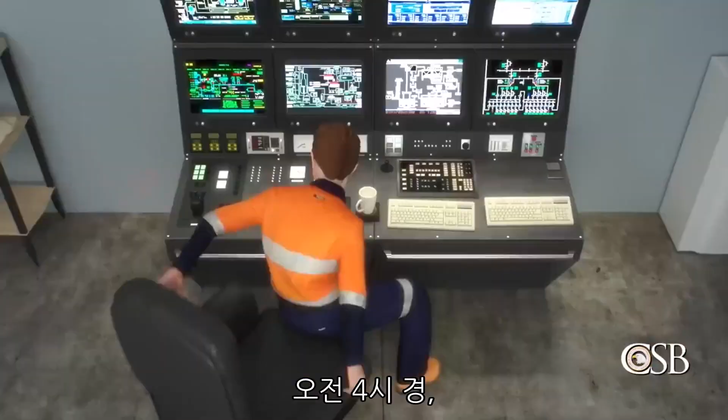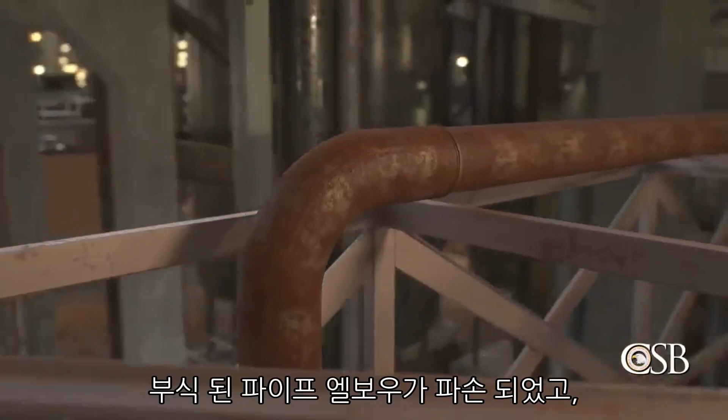On the day of the incident, the HF alkylation unit was operating normally. Shortly before 4 a.m., a board operator in the refinery's main control room performed a routine change in the configuration of the process within the unit. The operator increased the flow of process fluid in an area of the unit by a total of 7 barrels per hour. Stable operation continued, with no abnormal pressure or temperature changes in the unit as a result of these actions. But nevertheless, at 4 a.m., a severely corroded pipe elbow within the unit ruptured.

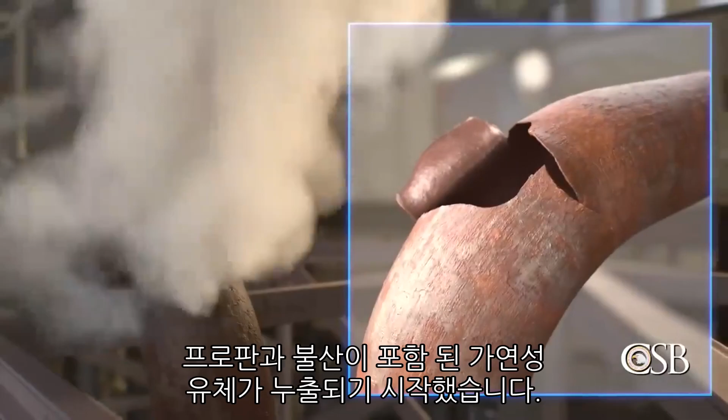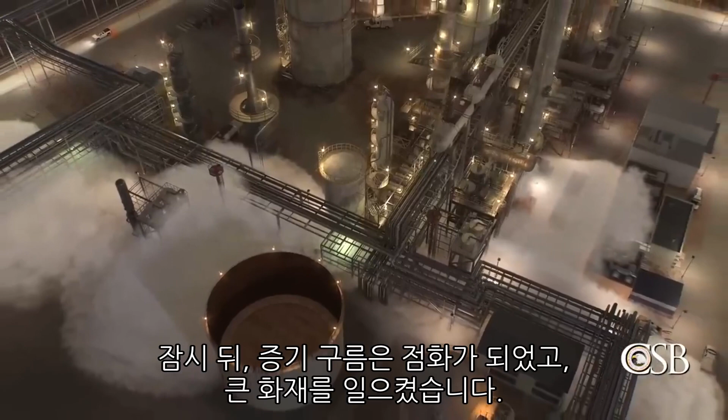Flammable process fluid containing mostly propane, along with a small concentration of HF, escaped through the failed pipe elbow. The leaking process fluid formed a large ground-hugging vapor cloud, about 10 feet high, that engulfed a portion of the unit. Moments later, the vapor cloud ignited, causing a massive fire.

Approximately 30 seconds later, the board operator took steps to prevent the release of additional HF. This was done by rapidly draining the unit's 339,000 pounds of hydrofluoric acid to a special vessel called the Rapid Acid De-Inventory, or RAD drum. The RAD drum was designed to safely hold HF in the event of an incident.

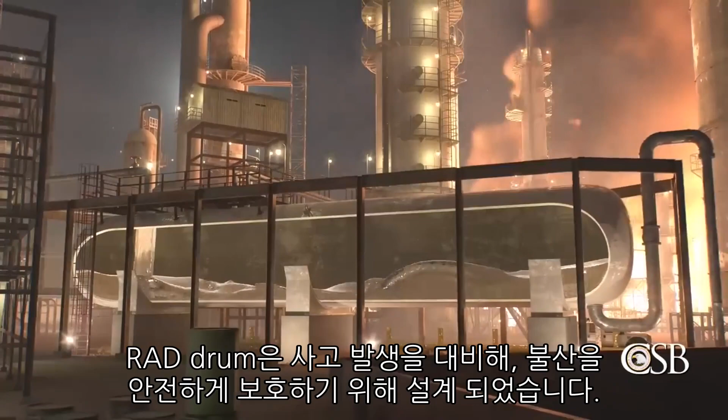At 4:15, due to the ongoing fire, an explosion erupted in the alkylation unit. 4 minutes later, a second explosion occurred. At 4:22, a process vessel in the unit containing flammable hydrocarbons violently ruptured, causing the third and largest explosion. A giant 38,000-pound fragment of the vessel flew across the Schuylkill River and landed on the river's opposite bank. 2 other fragments, one weighing about 23,000 pounds and the other about 15,500 pounds, landed inside the refinery.

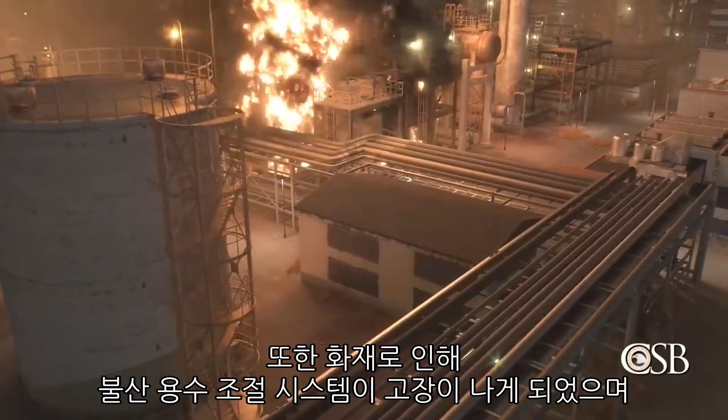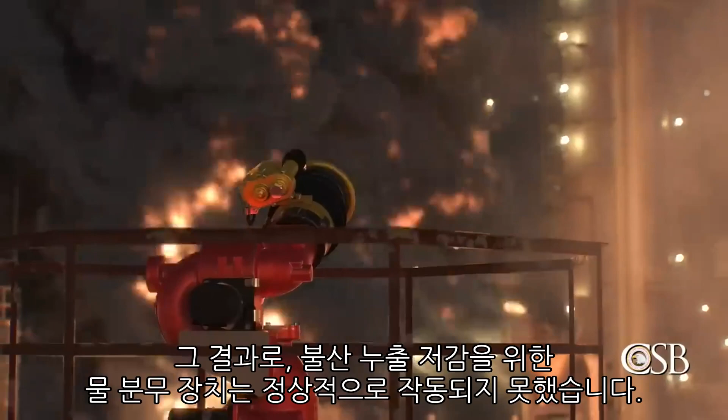The fire knocked out the control system communication to the refinery's HF water mitigation system, and the backup power supply to the system also failed. As a result, the refinery's elevated HF mitigation water cannons, which were designed to spray high volumes of water to help contain an HF release, could not be turned on remotely from the control room. The water mitigation system was a critical safeguard at the refinery, designed to prevent released HF from going off-site.

About 40 minutes after the release began, a refinery shift supervisor wearing bunker gear entered the unit and manually turned on a pump that allowed the HF mitigation water cannons to operate. Other refinery workers closed valves to stop the flow of hydrocarbons and steam into the unit. The fire burned for over 24 hours until it was finally extinguished the following day at about 8:30 a.m.

5 workers sustained minor injuries during the incident and response. The CSB is unaware of anyone off-site experiencing health impacts from the hydrofluoric acid release.

The CSB launched an investigation into the fire and explosions and found 5 key safety issues contributed to the severity of the incident. They are mechanical integrity, verifying safety of equipment after changes to good practice guidance, remotely operated emergency isolation valves, safeguard reliability in HF alkylation units, and inherently safer design.

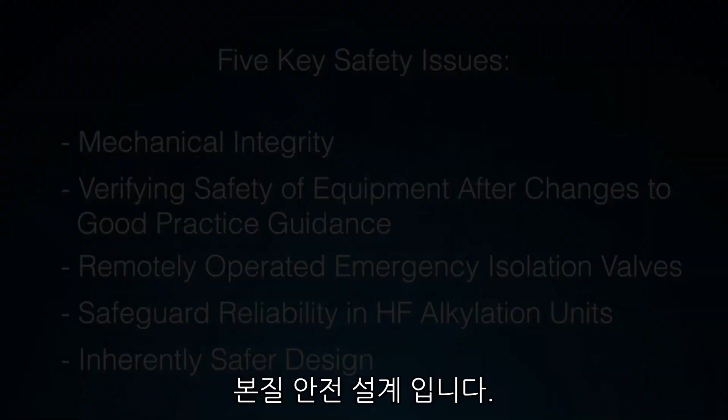The first safety issue is mechanical integrity. The CSB determined that the pipe elbow that failed had corroded faster than other piping in the HF alkylation unit.

That is because the steel pipe elbow contained a higher content of nickel and copper than other piping in the unit. Carbon steel is commonly used in HF alkylation units, but is known to be susceptible to hydrofluoric acid corrosion. In refinery processes using some amount of HF, hydrogen fluoride reacts with iron in steel piping to produce iron fluoride. The iron fluoride then forms a film that coats the inside surface of the piping and protects the steel from

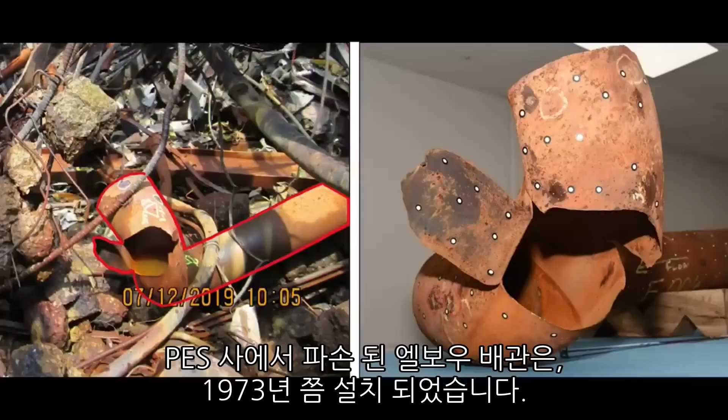corrosion. However, if the steel contains high concentrations of copper, nickel, or chromium, known as residual elements, the rate of corrosion is often higher. This is because the iron fluoride film that forms on steel containing high amounts of residual elements is less protective. The pipe elbow that ruptured in the PES refinery was installed around 1973. It had originally been constructed of a particular steel alloy that intentionally contained a higher concentration of nickel and copper. But by current industry practices, the high concentrations of nickel and copper in the pipe elbow meant it was not fit for service in a process using hydrofluoric acid.

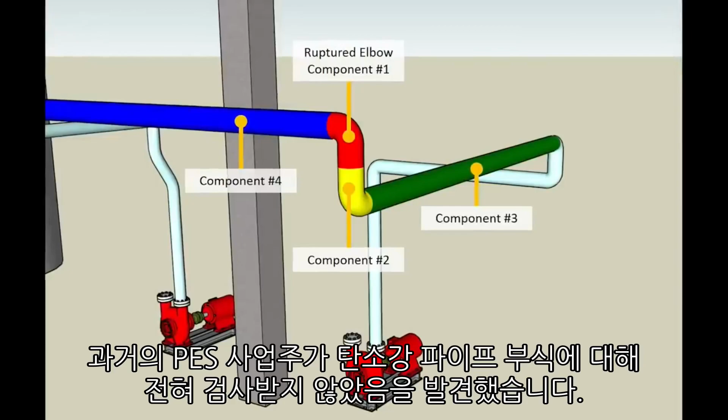Yet the pipe elbow remained in service for over 40 years, corroding at a much faster rate than adjacent piping components that did not have high concentrations of residual elements. The CSB also found that PES and the previous owner of the refinery never inspected all carbon steel piping circuit components susceptible to HF corrosion. Such a program was not required in the standard set by the American Petroleum Institute, or API, for the safe operation of hydrofluoric acid alkylation units.

But had PES or the former owner inspected all of the carbon steel piping circuit components susceptible to HF corrosion in the unit, they may have identified that the pipe elbow was corroding at a faster rate than adjacent piping components, which could have prevented the incident. After the incident, API revised its standard to include a new requirement for companies to develop a special emphasis inspection program to identify areas of accelerated corrosion in their refineries.

The new API Special Emphasis Program requires companies to inspect all individual carbon steel piping components in HF corrosion zones. This will prompt refineries to find any components that are corroding at a faster rate. This is an important safety requirement developed by API, and it should help prevent future catastrophic failures from this known safety hazard.

The second safety issue identified by the CSB involves verifying the safety of equipment after changes to good practice guidance. When the pipe elbow was initially installed in 1973, the standard set by ASTM International for carbon steel piping did not specify limits on nickel or copper content. Over the next decades, that standard changed, and by 1995, the ASTM standard had been revised enough that the pipe elbow no longer met its requirements due to the elbow's high levels of nickel and copper.

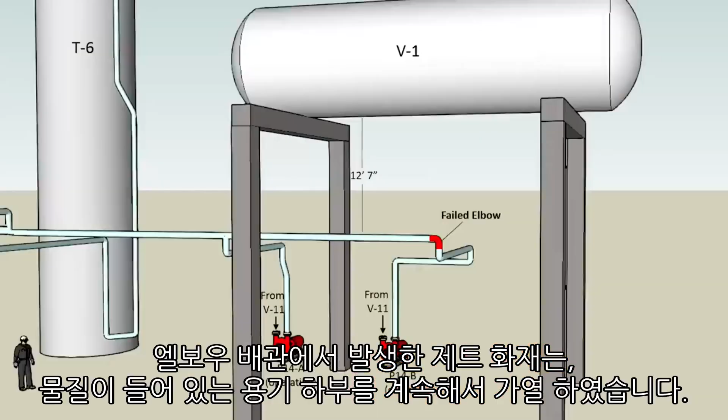The largest of the three explosions at PES occurred when a vessel located above the failed pipe elbow violently ruptured. The CSB concluded that a jet flame shot from the ruptured pipe elbow and heated the bottom of the steel vessel, which contained a large amount of flammable hydrocarbons. For over 20 minutes, the jet flame erupted from the failed pipe elbow, weakening the steel bottom of the vessel and causing it to stretch and thin. The vessel then ruptured, launching 3 huge fragments into the air.

The CSB found that there were no emergency isolation valves installed in the HF alkylation unit to remotely isolate nearby hydrocarbon sources that could then flow through the failed elbow. And these valves are not explicitly required by the current API standard on safe operation of hydrofluoric acid alkylation units. Prolonged releases and fires in HF alkylation units can cause equipment ruptures, compromise safeguards, or lead to releases of toxic hydrofluoric acid.

Companies need to install remotely operated emergency isolation valves to quickly stop releases before they become catastrophic events. As a result, the CSB made a recommendation to API to update its standard on safe operation of hydrofluoric acid alkylation units to require installation of remotely operated emergency isolation valves on the inlets and outlets of all hydrofluoric acid-containing vessels, and any hydrocarbon-containing vessels meeting defined threshold quantities.